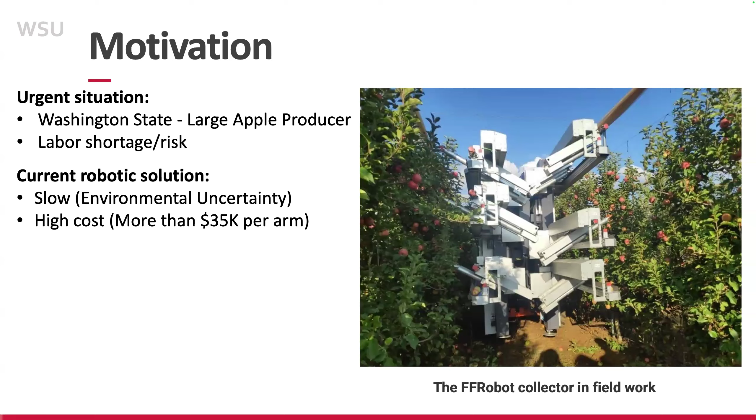And sometimes the problem comes from perception. You cannot really locate the apples, and also it's really hard to do the calculation for approaching apples. When approaching apples, the robot may not grab the apples. So two things: one is efficiency, and another is the high cost that most growers cannot afford. But it's also an urgent issue because of the labor shortage.

So for the solution we proposed, first, we always talk to growers: what robot technology do you really want? First, they really want a high speed robot. Second, they really want the device cheap. Third, they really want a robot that can run 24 hours a day.

And also when it's raining or when the temperature is really high, or even when there's smoke around, especially in Washington State, they always have smoke coming from the mountains, the workers cannot go outside, so the apples will stay on the tree.

And another thing is a universal solution. The slide shows apple picking, but they have other operations, for example pruning, pollination, flower thinning, right? So they really want to use one robot to do everything. The picking season is 20 days, so you use the picking robot for probably 1 month, then you just put the robot in the garage and cannot do anything with it. So we really want a universal robot. This is the survey where we asked growers what they really wanted.

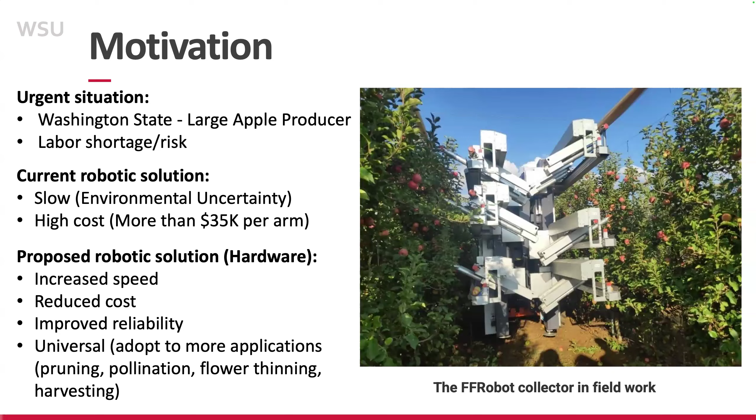Okay, so this brings up the questions. So we framed the solution to this problem as a cyber-physical system. So this is the solution that came out here. So first,

one reason the robot is slow is its action. What that means is the robot and the camera know the apple position, but it's really hard to figure out how to approach the apples, especially when apples grow next to each other in a cluster. They don't know which one to pick first. They get confused. And sometimes they don't know the right trajectory to approach the apples.

So what we do here: for example, the current apple robot can only achieve picking of about 60%. This is actually the current state of the art. So 40% of apples are left on the tree that the robot cannot handle. The reason can be perception: the camera is missing the apples because of lighting issues, or the leaves may block the apple a little bit, or maybe another apple is hidden behind.

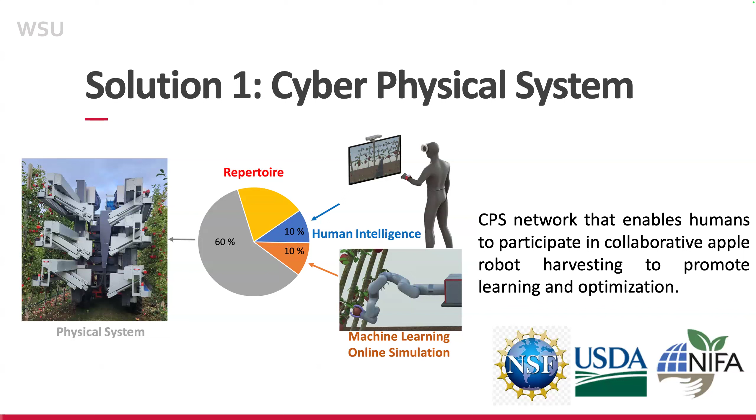Okay, so how do we do that? You may think, oh, this is probably the software side, because everything with calibration gets the trajectory, and we basically verify the trajectory and put it in the database for machine learning. It's more the software side of the project. Actually, it's not.

We are thinking about what's the best robot for this project. As I mentioned, the current robot is so expensive and kind of slow, right? So what kind of robot has faster response, is low cost, and can cover all the operations? And also it should let humans calibrate it more easily. For example, if you calibrate a 6 degree of freedom robot, it's kind of hard to map to each joint or position because there's always the inverse kinematics problem.

This is the difficult part to pick, because you see the apples, but you really don't know which apple should go first. If you pick in the wrong order, when you pick one apple, the other apple will fall to the ground, right? So this is kind of a waste. Okay, so this is the second thing.

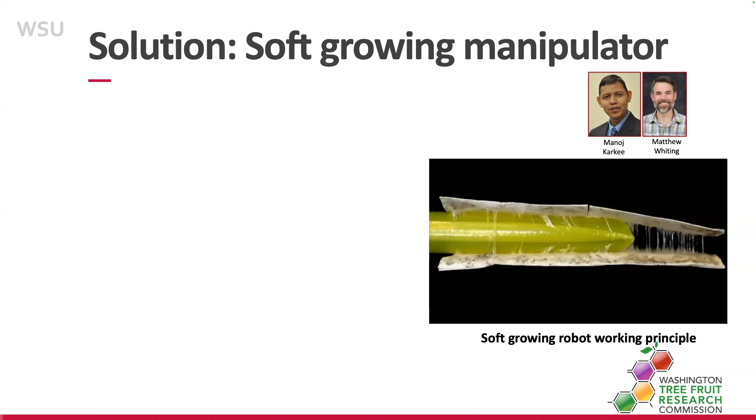So the solution we propose is from my postdoc lab at Stanford. It's called a soft growing robot, which is a pneumatic robot, and it's growing like a fabric, plastic, softer material. So the good thing is the linear position, linear growing motion here.

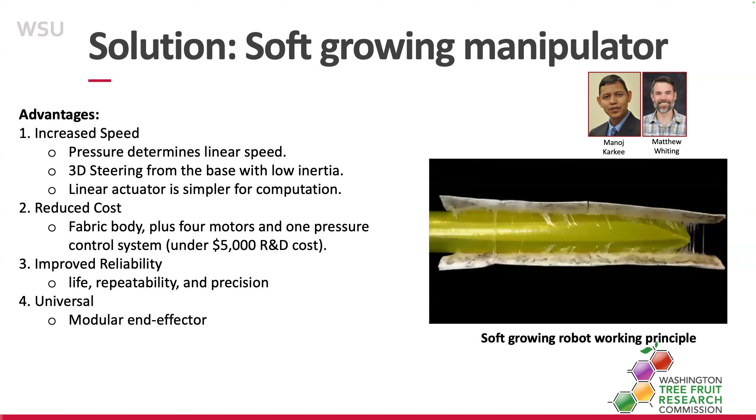If you see the apples, right, the shortest distance is a line, right? So this robot actually doesn't have any joint, and you can see it just directly grows linearly to approach the apples. Again, we only use it in the 2.5D modern orchard, because most apples don't have any branches or leaves blocking the front.

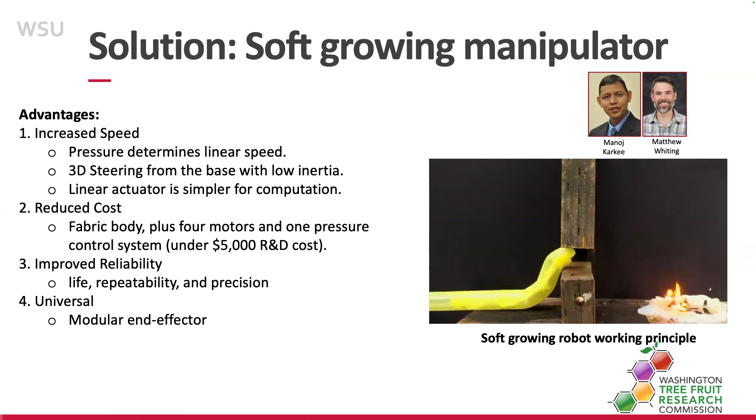The reason I want to say that is sometimes my paper gets rejected because the reviewers don't realize these are modern apple trees. They think about regular trees: oh, how does your robot avoid the branches? So they bring this kind of question that is out of scope of our paper. That's why I wanted to emphasize what problem we are looking at here.

And it's a linear actuator and fast because it is pneumatically driven. Some researchers developed linear actuators for picking apples using a rigid transmission, for example a linear screw. But the problem is it slows down the speed, because the linear screw gear transmission is really not the optimal one. With this one, you have pressure, you just grow and you can reach the target. It's a fabric body, everything is really cheap, low cost.

People criticize soft robots basically because, one, the material is not precise enough. Second, it's not stiff enough. People may question: are you really sure the robot can carry the apple? Are you sure the robot can precisely pick and grab the apple? And also reliability: you are pneumatic, and it's just a plastic sheet.

It's very easy to burst, right? If a nail catches it, it will blow up. So how do we improve the stability and the robustness? And the third, the last one: we want the robot to adapt to different operations. Can we have one robot solution here?

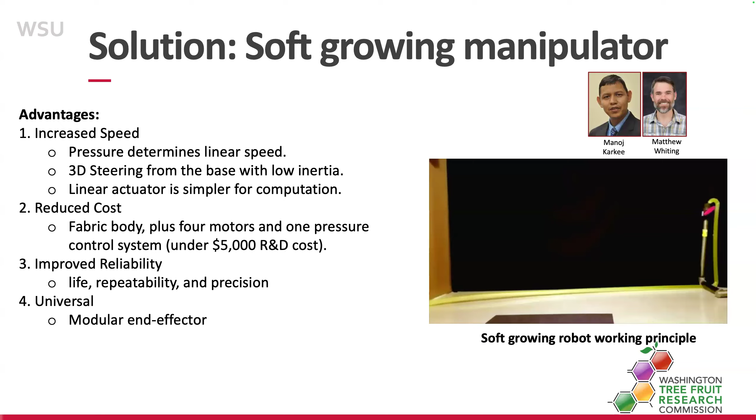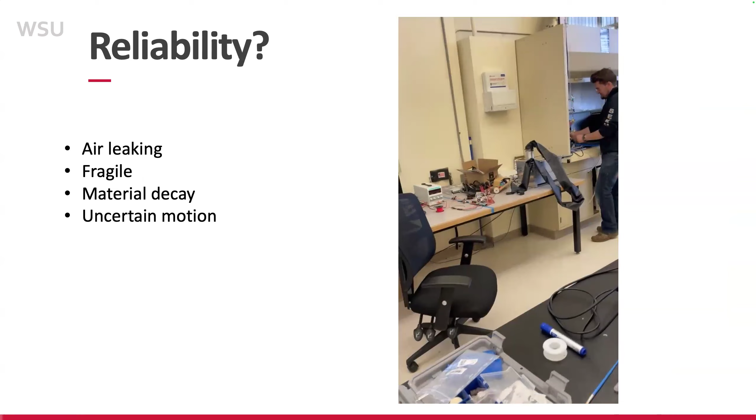So let me talk about one example here. In our lab we tried the robot; this is the structure for safety. We increase the pressure to see whether the stiffness change is enough to carry an apple. Here the student turned it to a very high pressure, 18 psi, so it's really rigid. So what is the solution we have? Because the robot is soft,

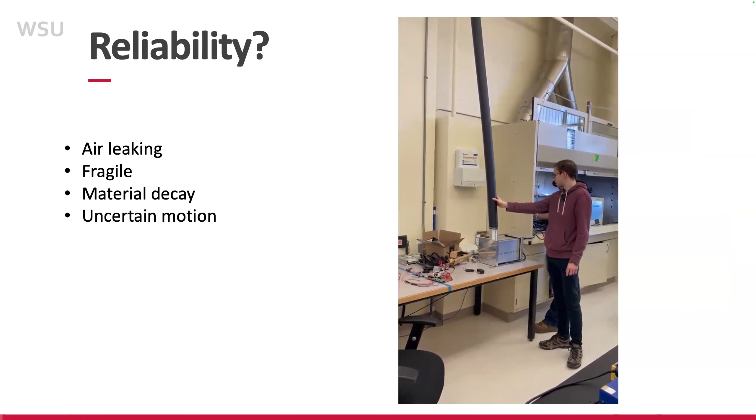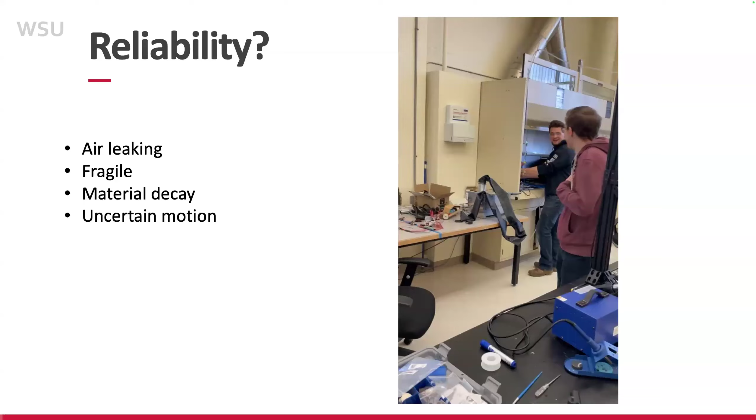if we have very good fabrication to tolerate injecting enough air pressure, it becomes rigid. So it will have stiffness and enough payload to carry an apple, and because it's rigid, it can also reduce uncertain motions and improve the position control.

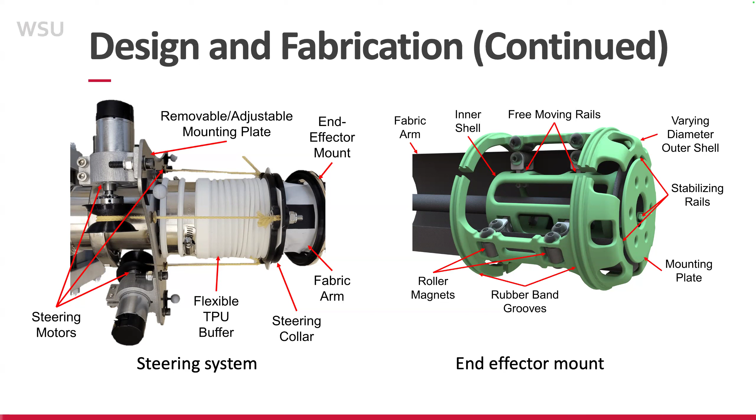And this is some CAD designs. We have a robot that can do linear motions. The question is how we steer the robot; we use a cable-driven approach, and we also have an end-effector mount which can carry the gripper, cameras, scissors, different tools, to adapt to different operations. So we try to develop a low-cost, robust, fast-response robotic platform which can carry any tool and use any machine vision technique to achieve different operations.

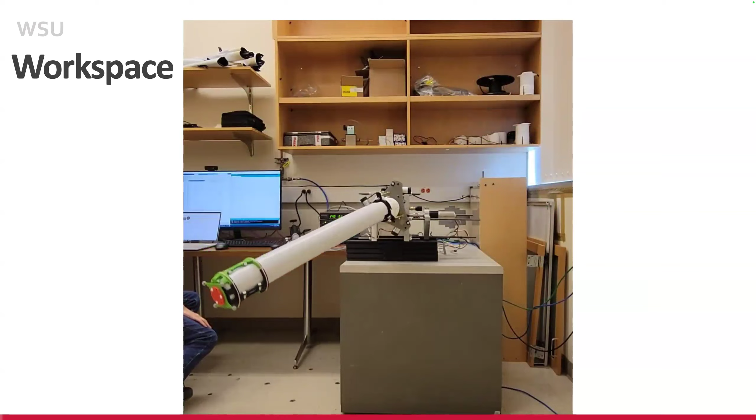So this is one example here. This shows our robot's workspace. It can grow, I'm not sure how to convert to inches, about 1.2 meters, and the maximum bending angle is 60 degrees. And you can see the robot can be much shorter. So that's about the workspace.

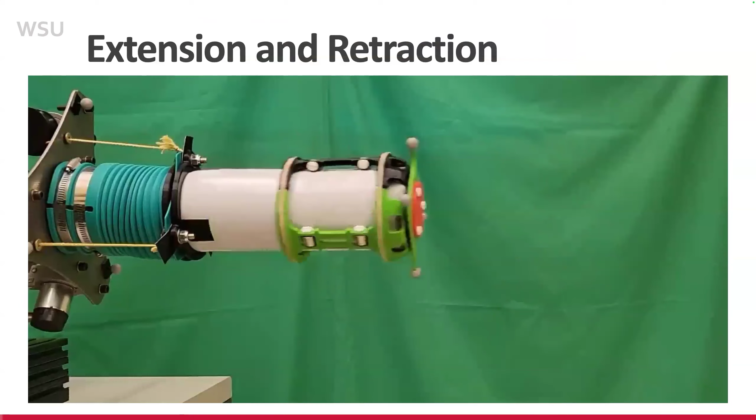And this is the video of how it can grow and retract. So again, if you see the apples, the apple doesn't have any branches blocking you, right? So what's your solution here? The tendons steer the robot in the right direction towards the apple, then it grows linearly over a short distance.

It's a fast one, and the growing speed is really determined by the pressure, and also the internal pulley to release the material. Actually, they don't have lead screws. It's the rigid gear mechanism solutions which have efficiency issues. And this is the current payload and the speed we are trying to do.

So basically, we are now at the stage that we have enough payload to carry one apple and the camera gripper with no problem. And on the speed, we can keep increasing the speed. Now it's 13 inches per second, but we can definitely have more pressure, and we can have faster releasing pulley here. And also our robot can tolerate 20 psi.

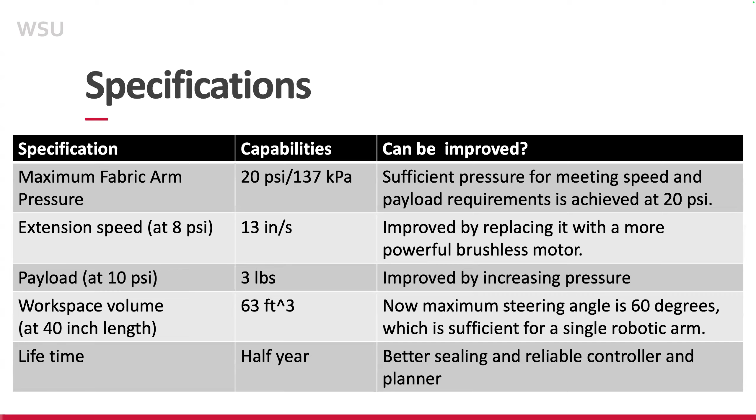It's actually really huge. And for our lifetime, basically we run the robot in the lab every day, and it's only broken after half a year. So why is that true here? Because our robot's fabric, you see the white one, is a very strong fabric with TPU coating. So its features are really like your rain jacket. That's why we have very high quality fabric.

And this is another thing here. I want to talk quickly about that. So we have a robot, and we want the robot to approach apples, right? So then the problem here is how to control the robot fast to reach the positions, how to develop the controller. So we basically start from traditional modeling here.

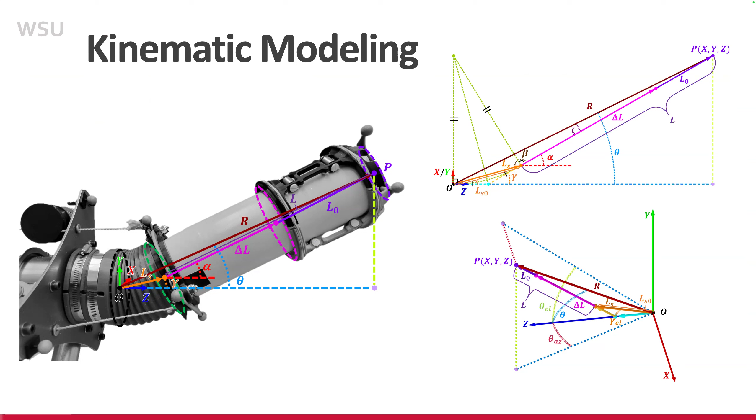We get a kinematic model, and then we verify the model accuracy, because if you have the model you can predict, for example, if I want to reach the apple, what the length of the robot and what the steering angle should be from the model. So you have a good initial guess. If you have an initial guess, you really make your controller adapt and converge to the desired target much faster than without any pre-knowledge.

Another one: our robot has 3 degrees of freedom. Think about it, we're steering on a 2D surface. You have two steering the robot and then the growing robot, and we really want the robot length and the two steering angles to converge at the same time. So that's why we use model reference adaptive control here.

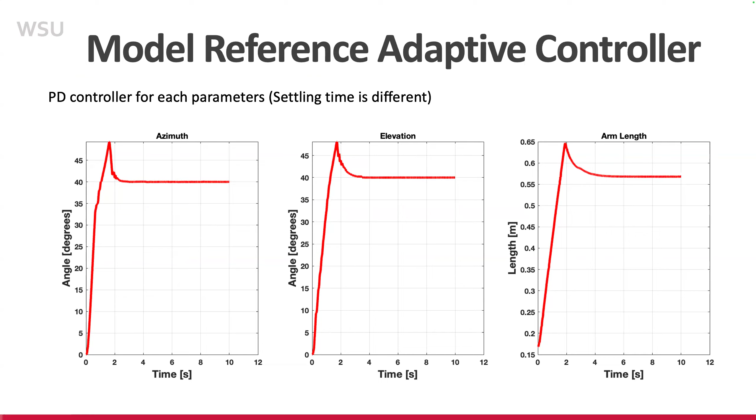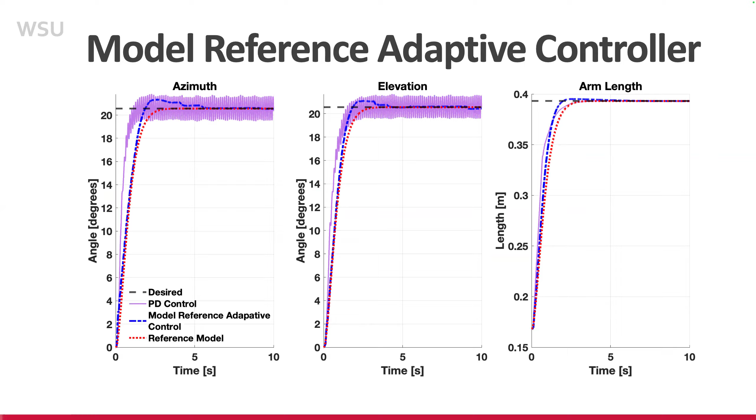So the problem here: if the robot length has already reached the desired target, but one of the angles has not reached its target, it will screw up the other 2 parameters' stability. So that's why we really want 3 parameters to reach the target at almost the same time to avoid that happening. So this is all the control stuff, the structure. I'm going to skip that. We use model reference control here. You can see the 3 parameters almost converge at the same time. Okay, so this is the robotic side.

Now we are talking about the machine vision side. My collaborators are the people doing the machine vision. They have existing algorithms like YOLOv7 object detection. They can detect 99% of apples. We have not only RGB but also depth information. And the algorithm can detect which apple should be picked, whether it is mature or not, and the location of the apple the robot should pick.

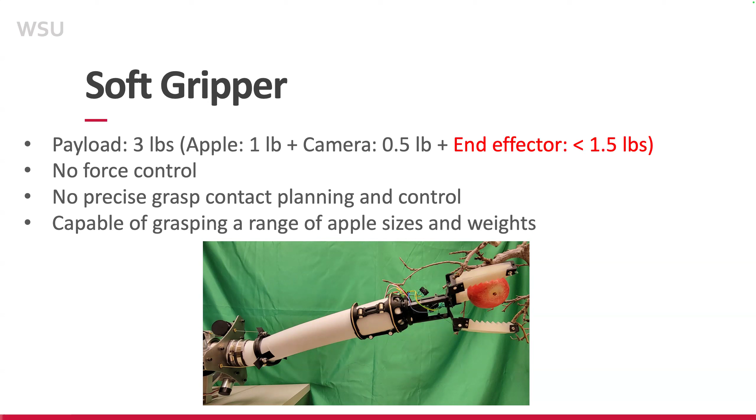And then we also have the cameras and the grippers. So this is the gripper here. We showed that our robot payload is 3 pounds, apple 1 pound, camera 0.5 pounds. So then we calculate that the end effector must be less than 1.5 pounds. So we still use a soft material, a soft gripper here. It's basically silicone rubber with some TPU material, and the inside skeleton is 3D printed.

This material is soft. So basically you grab the apple, you don't crush the apple. If you use a rigid robotic gripper, you may crush the apple, so you have to do some force control. These grippers can wrap around apples of different weight and size, and it's lightweight. And the question is how we detect the apple is grasped. If you look at the circle on the palm, this is actually the limit switch. When you grab the apple and the limit switch triggers, it makes sure the apple is on the palm.

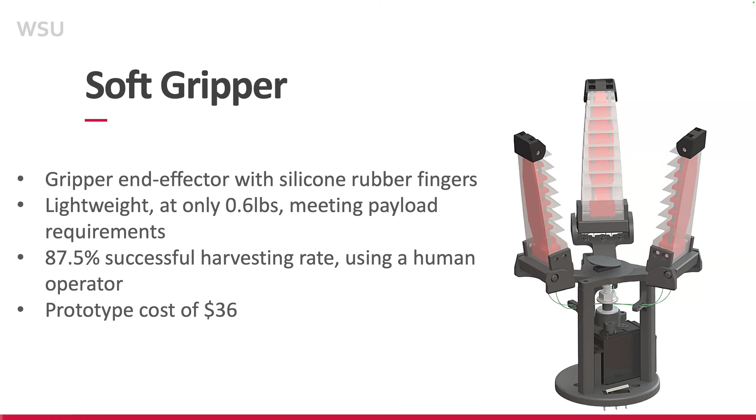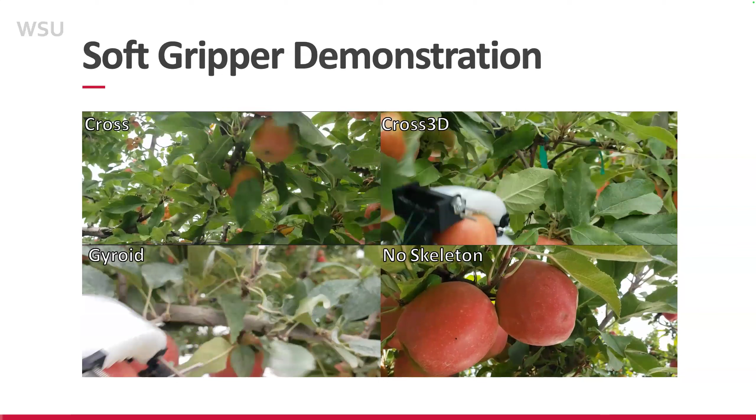So this is all the fabrication, and we tried the gripper here, and showed that with the gripper with a skeleton, approximately 87% of apples can be picked. We tried it in an orchard.

Okay, so this is the robot. I just want to make the conclusion here: it is low cost, and the cost is under $5,000 for R&D costs. So if we really want to go to the commercialized stage, we have a mobile robot, and we can put at least three robot containers on each side. Basically, because our robot is cheap and very easy to do the computation, we can deploy as many as possible to improve the efficiency.

Another thing about our robot: each location has only one solution. What that means is, if you pick one point XYZ, there is only one solution for the robot length and the two steering angles. If you talk about a 6-degree-of-freedom robot, with IK, the same position may have a different configuration because of its joints. That creates redundancy.

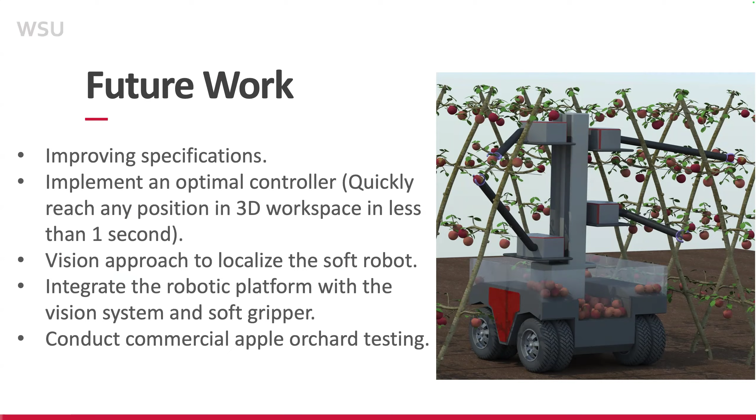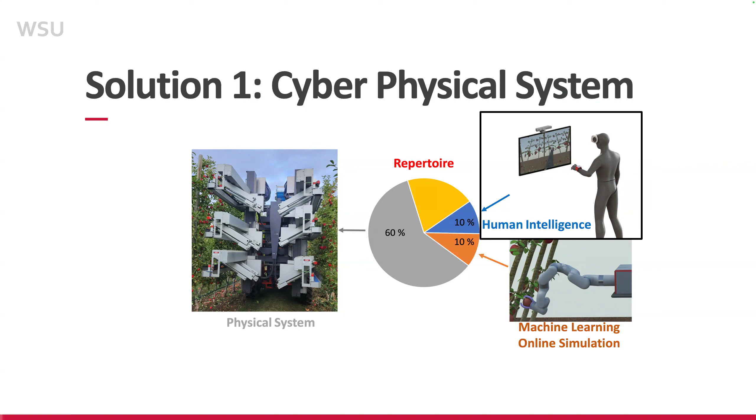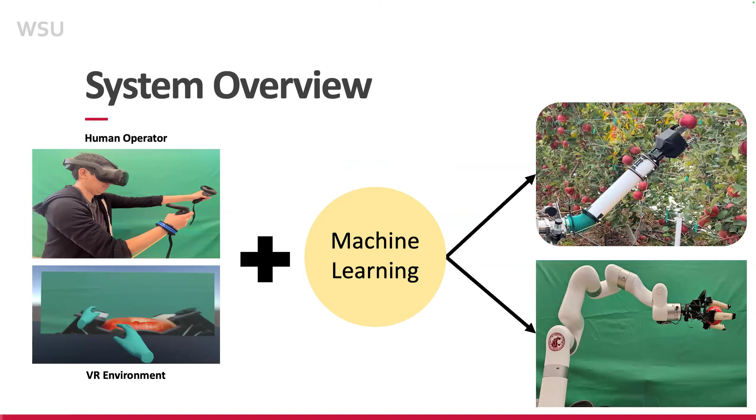Okay, so this is the robot side. Now we'll talk about the teleoperation side: how we use human intelligence to teach the robot if the robot has a problem approaching the apples. The solution is to use a VR device plus machine learning. So what this means is the robot is in the orchard, and the human operator is not in the orchard. They should be at different locations.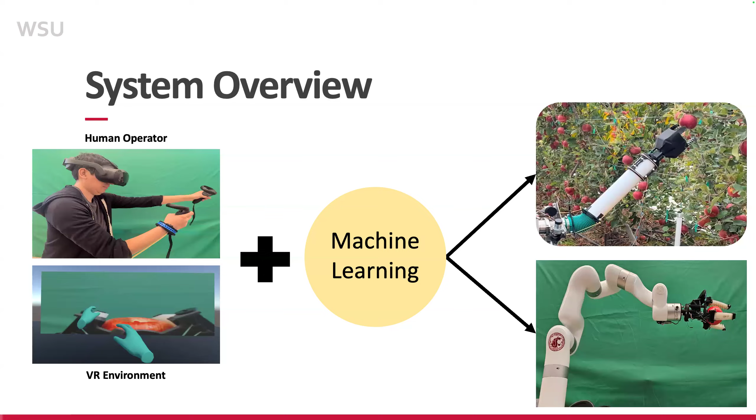So the robot has cameras to stream the data to the VR glasses or the monitor. We still have not decided which is the right one. And you see the student here has a joystick, which senses the 6-degree-of-freedom or 3-degree-of-freedom pose. What we try to do is map the user's pose to the robot to achieve the picking scenario here.

So why is this so important? Because when you do the operation, all the information is from your eyes, right? You look at the orchard, where the apple is, and you try to make sure the robot is at the right position, because it's still remote. So you may miss some information. For example, here the robot is out of workspace, right? You keep moving your arm, but the robot is already out of workspace. Then haptics can give you feedback: okay, your robot is out of workspace, you have to go back.

Another thing we are thinking about is how we regulate the human. For example, some humans really shake their hand sometimes, and we really want to guide the human when approaching to generate a much smoother trajectory. So we are still investigating whether we should add haptics in the whole teleoperation stage. So this is one demonstration here.

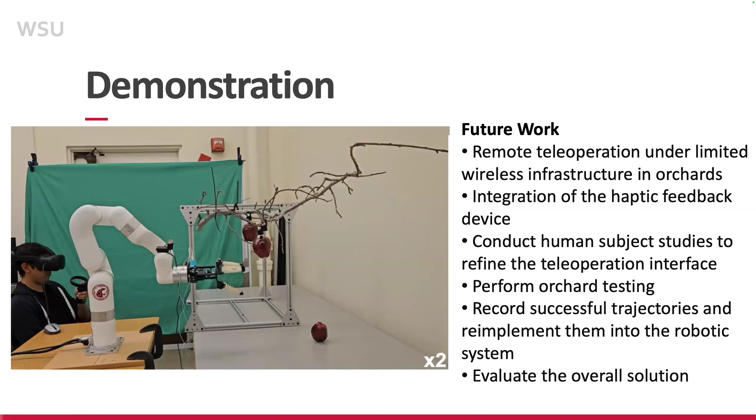Okay, so this is the second part. Now I want to talk about a different thing here, aligned with this project but not really a CPS. We also propose another solution here, to repeat the difficulty.

The current robot is kind of slow and inefficient because it can only pick 60% of apples. The problem is the environment is unpredictable. Some apples are located in very weird locations, and the robot is difficult to approach. Also there's the identification issue: some apples are blocked by leaves or branches that the robot cannot recognize, so it wastes a lot of time on machine vision. And the speed - some apple positions are computationally expensive to figure out the right orientation and location to approach.

So the question is, instead of using technique to improve success rate, can we do a human-robot interaction approach? What this means - look at the picture here - it's not that the human picks an apple first then the robot picks, and it's not that the robot picks first and the human then picks. It's basically human and robot working together. I'll give you an example here.

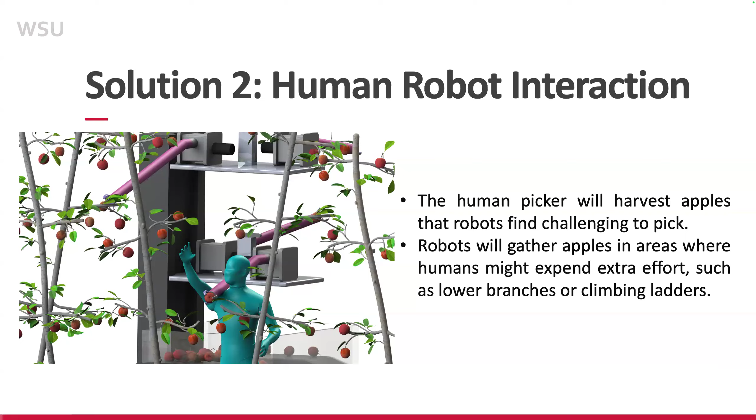So this research really asks about psychology issues - do you really want the robot to work with you as close as possible? The current standard, called the ISO industry robot standard, requires the human and robot to keep 20 inches of distance. That means if you get closer than 20 inches, the robot must stop. So there's a question here: the technology may be ready in the future if we have soft robots.

It's basically totally soft, and I'll show the video of the human robot in action.

If that stage comes, for example a caregiver in nursing, where a robot works together with you in physical contact, what would you do? We want to look ahead at the psychology here, to see how the robot affects your psychology. Some people are against this new technology, feeling anxiety, or worried robots may take their job, or simply don't want the robot around.

So these are two robots here. On the left side is the soft robot, and on the right side is the rigid robot. The question I'm asking is: in the future, if you want to buy a robot to clean your kitchen, or what we call a 'third hand' to help you, would you prefer the right robot or the left robot? I can tell you the left robot has much better safety features. But compared to the rigid robot, the soft robot still has problems with perception and payload.

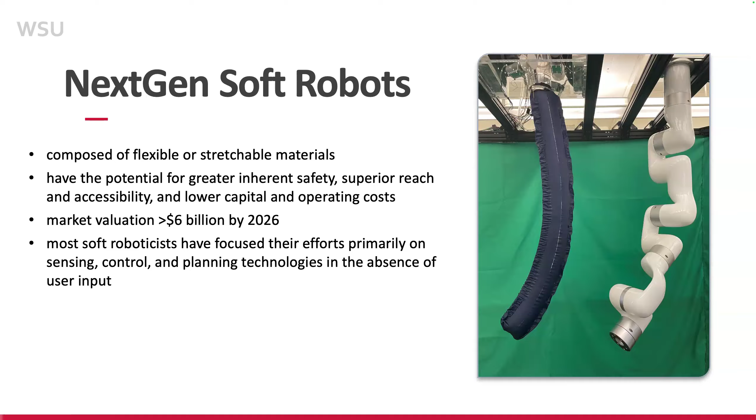So what we are working on is building the same scale of robot that can do useful tasks, grasping and delivering something. That's what we do, so this robot can be safe.

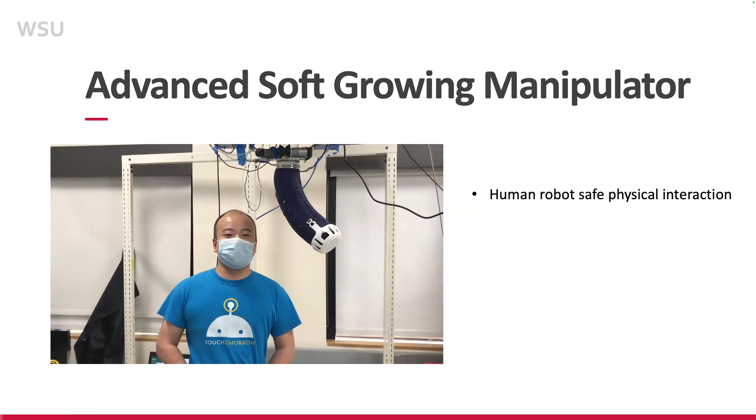I'll show the video here, where I let the robot crash into my face. It's fine, it's pressurized just like an airbag, because of the soft features, and it can absorb the contact force.

This is another robot, and instead of a linear line, this robot can grow and retract, and also curve. Think about a robot that can curve around your body to approach something. This is the technology we're working on.

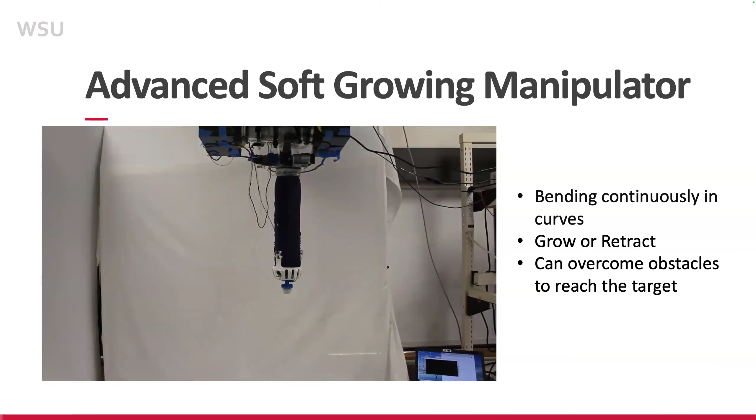Okay, let's get back to psychology. If you talk about a robot working with you, there are a couple of things you may pay attention to: one is soft versus rigid, the material, appearance, maybe male or female. Another, more technical, is the distance - what proximity makes you feel uncomfortable versus comfortable to work with.

The second thing is speed - do you prefer a slow robot, or do you prefer the robot to move very aggressively? This is what we try to find an answer to.

So here's a scenario. I worked with our school psychologist, Tahira Probst, who is a social psychologist and has done a lot of research on fear, anxiety, and job insecurity. She has a technique to quantify human anxiety.

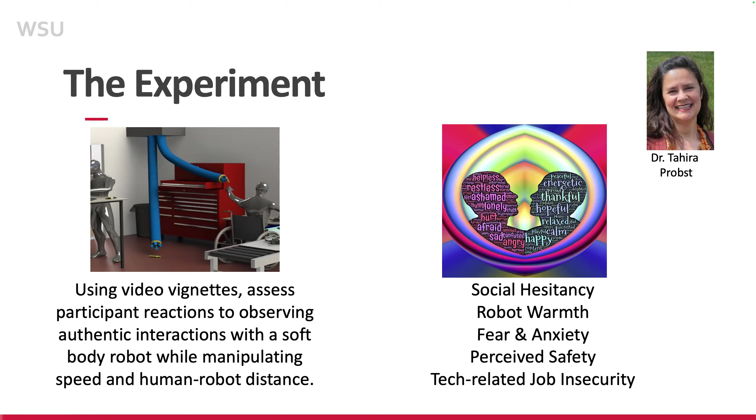So what we do here is a cooperative task. It means you either put the cube in a box first and let the human grasp it, or you give the cube to the human directly - meaning they are really close in the interaction. If you put the cube in a box and stay away, the human grabs the block, keeping some distance.

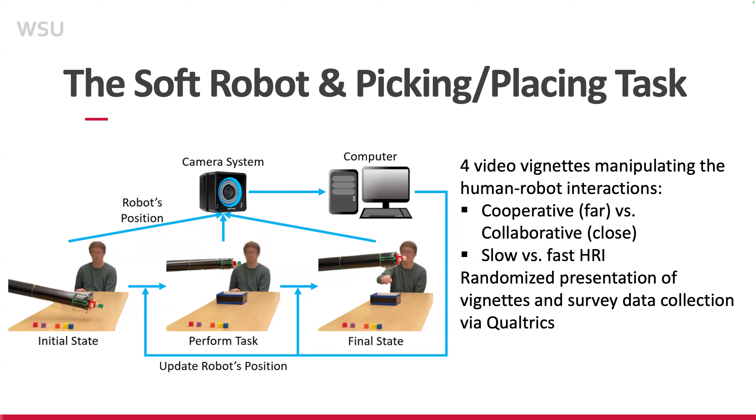The second thing is we tried different speeds of the robot - running it fast or slower - and recorded a video, since this was the first stage and we didn't bring participants into the lab due to IRB issues. So we just recorded a video and asked for human opinions. We tested this with 122 students.

Here's the result: students who had played with a robot before or played a lot of computer games preferred the robot to go faster. If they had no experience, they preferred the robot to go slower. Another finding from these studies is that proximity was not significant in affecting human psychology.

But I won't fully commit to that finding, because they only watched the video. We feel that if we bring participants into the lab to play with the robot directly, proximity may affect them a bit more. We're not sure, so we haven't done the second stage yet - we're already writing a proposal for it.

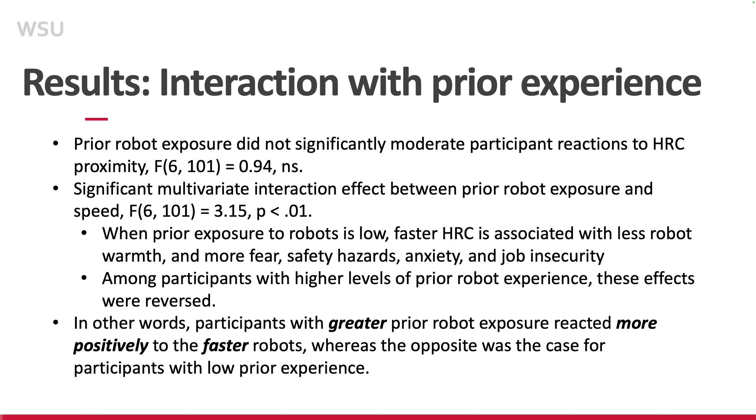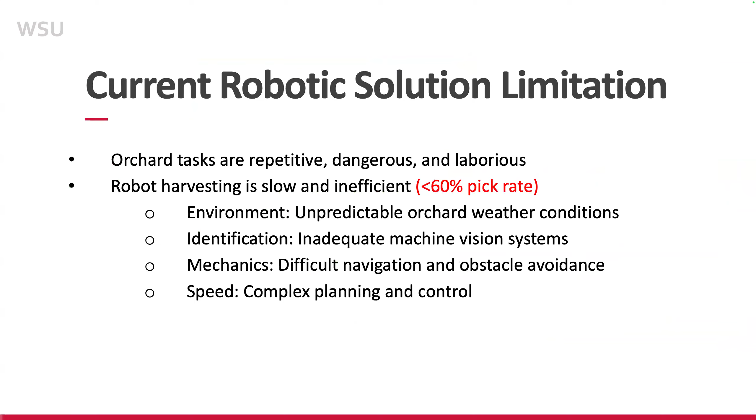Okay, let me back up, that's a good question. Let me show this one. You can see our robot can retract it directly. So when you grab the apple, you retract it to detach it from the branch. Our force is enough to detach apples, but the problem is the growers don't like that because it will damage the branches. If you look at how a human picks an apple, they grab it and lift it a little bit. So that's the motion we are now doing, though I haven't shown it in the slides. We have a gripper which adds another twisting motion, so instead of just retracting, we also twist to avoid damaging the branches.

Another thing I want to mention: the growers told us they really don't like the gripper idea. People always default to grippers, but the best way is to use scissors to cut the stem. The problem is that it's not so much a robotics problem, it's a machine vision problem, how to detect very tiny branches in order to cut them. Then there's another problem for the computer science side. So I'm not sure if that answers your question or not.

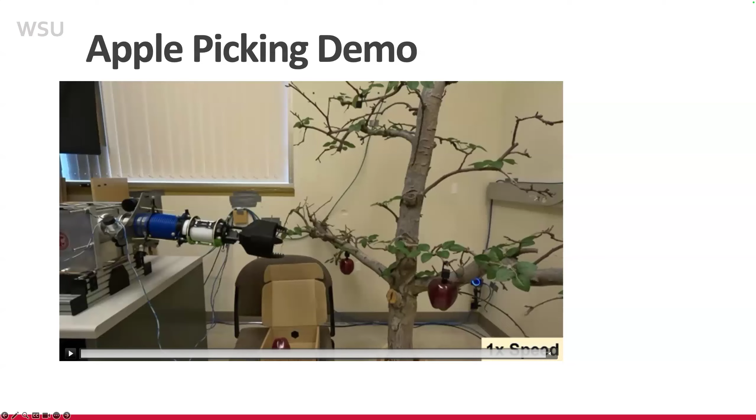Getting connected with Martinelli's. The Martinelli orchards are down in Watsonville.